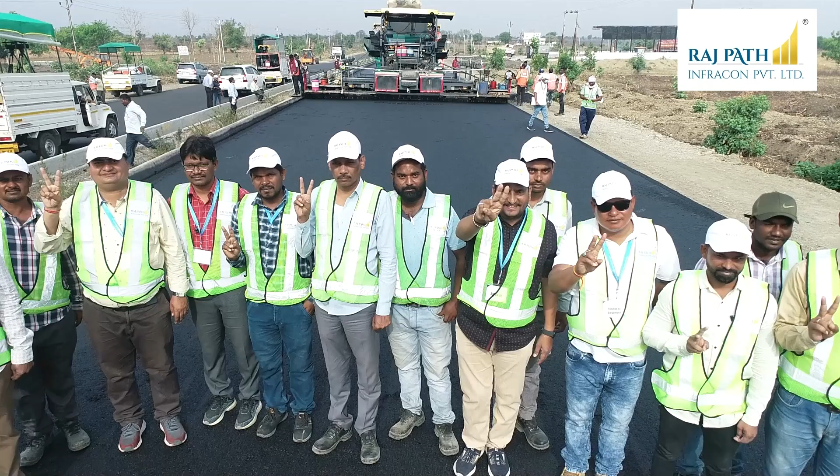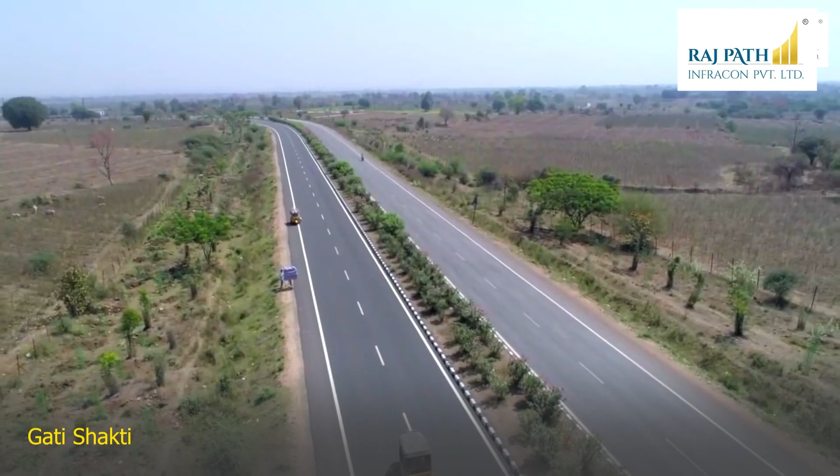The project Zauri 2.0 was born, driven by a will to pave a road of 75 kilometers and dedicate the effort to the nation to commemorate the grand 75 years of Indian independence, Azadi Ka Amrit Mahotsav. The honest intent was also to endorse support of the Gati Shakti project launched by our Honorable Prime Minister Mr. Narendra Modi, under the able leadership of Minister of Road Transport and Highways Mr. Nitin Gadkari, for multimodal, integrated and seamless connectivity for the movement of people, goods and services across our vast country.

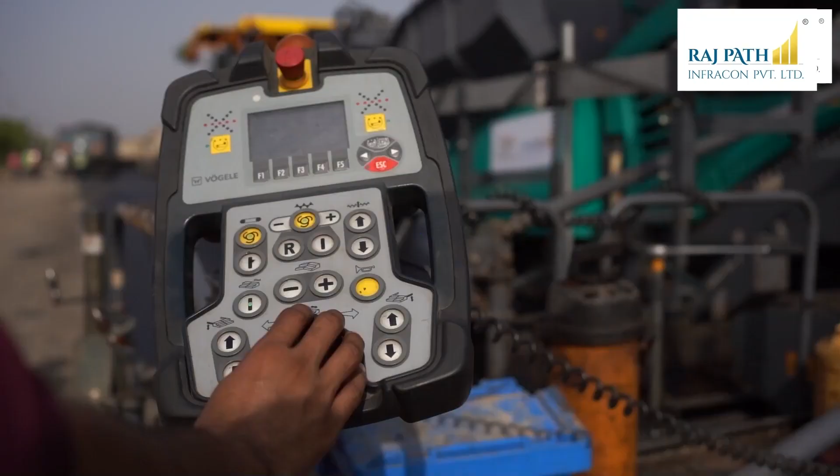The keys turned in the machines and paving began. From then on, the work continued seamlessly and non-stop, round the clock for 5 days. The team's tenacity and perseverance was tested to the limits.

The field team had to combat the 47 degrees Celsius temperature of the scorching sun and survived a 150 degrees Celsius of the freshly paved bituminous concrete on the ground.

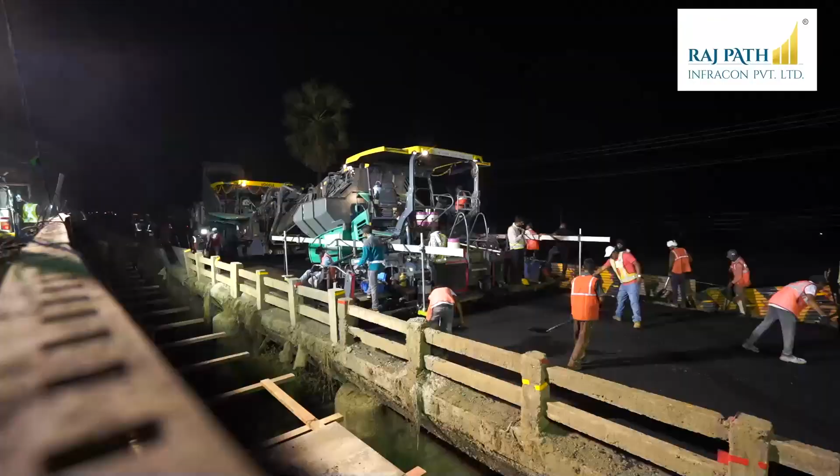There were tricky bridges to be paved, but Mr. Kadam's presence and guidance saw the team handle such curveballs smoothly.

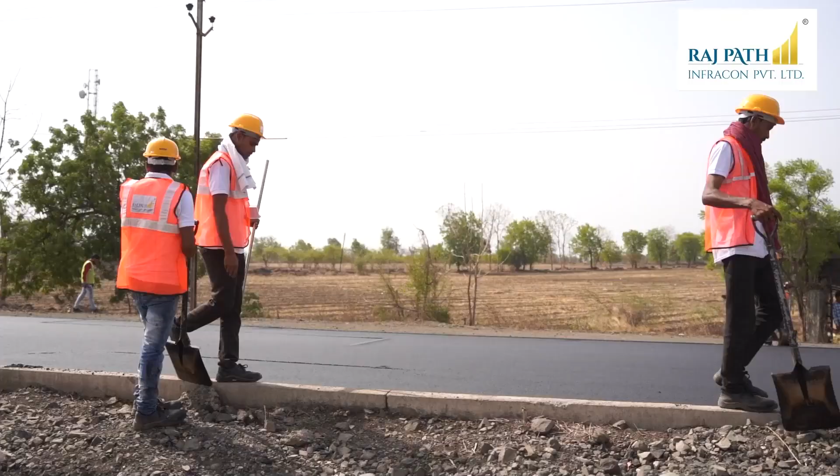The front and back end team went sleepless night after night to watch, monitor, supervise and ensure no glitches or hindrances created any obstructions in the work. They ate dinners in the fields and did not bother to even get changed.

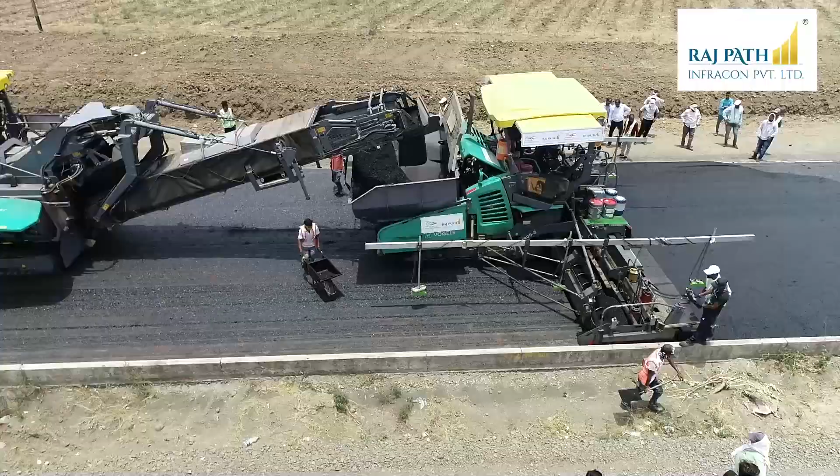There was no dearth of challenges that cropped out of nowhere despite intense planning. One of the batch mix plants broke down and the feed for the continuously operating paver was in jeopardy. This was managed by getting the required quality of bituminous concrete from a batch mix plant 80 kilometers away.

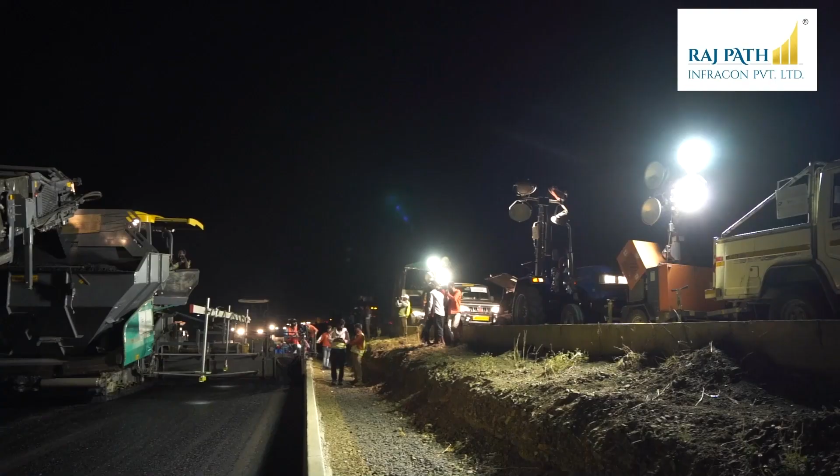The machine maintenance tasks included oiling, greasing, maintenance, troubleshooting and fueling without ever halting the paver. The expert teams from respective machine suppliers stood vigil to ensure seamless operations of such jobs and carried them out with fluent expertise. Despite all this, the work did not slow down or halt at all.

Accepting challenging assignments and making the impossible look simple has been the hallmark of Rajpath Infracon Private Limited. Rajpath looks at this accomplishment as an invaluable opportunity to leave its mark in this scheme of nation building and development that truly defines their motto: building the nation, beaming with pride.

I would request Mr. Kadam to kindly address the gathering.

I have 17 minutes more. I know it.

I must appreciate Thermax for initiating such a good event. This is, I think, the first event, the first year of Gapshap 2023. And I am the first speaker. I know my responsibility.

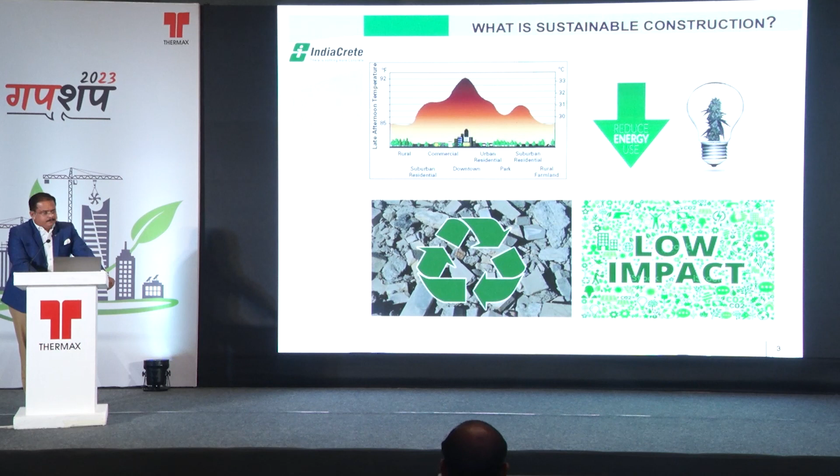We find environmental issues caused by bad management like CO2 emission, climate change, acid rains and deforestation. But by choosing the right kind of alternative energy, we can control this, and I think there is a need for the industry to properly select the amount of power consumption, water consumption, and control biodiversity, because ultimately we are responsible for our future generations.

If we consciously handle this material management, I think we can create long-term impact and reduce carbon emission and increase efficiency. Of course, during the delivery of the product, like constructing a building or structure, the maintenance part is also important, because by handling it efficiently and maintaining the building, we can increase the life cycle of our structures. And as we increase more and more the life cycle of the structures, we are indirectly contributing to reducing the carbon footprint.

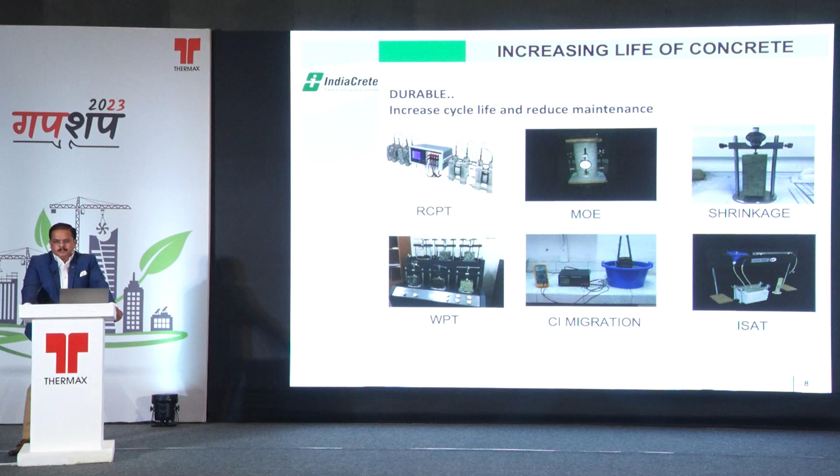Chloride migration and CI migration can cause long-term effects on your concrete and create weak concrete structures. So analyzing those impacts by properly testing and adhering with supplementary cementitious materials is one of the key areas.

Modulus of elasticity, understanding the stiffness of concrete, understanding the creep effect when constructing high-rise structures particularly, is playing a key role.

Water penetration test, water absorption test are giving increasing life for your durable structures, which can surely reduce down your maintenance cost and rehabilitation cost.

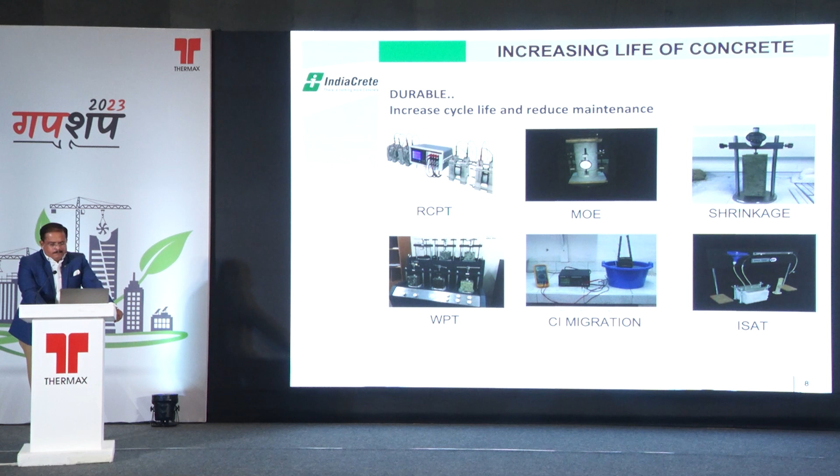You can have majorly larger floor spaces for utilization as well as for selling, from the developer's point of view, when they are constructing buildings.

With high performance concrete, you can reduce down the self weight of the structure and make your structures more rigid, more robust. The long-term effect of these kinds of things will surely increase the durability of the structure and help to create a sustainable environment.

Self-compacting concrete is one of the key areas where generally we are ignoring it because of the increment in cost. But trust me, the increment in cost versus the advantages we are getting are phenomenal.

5% of honeycombing is reducing your concrete member's strength by 25%. With congested reinforcement, and when you are spending so much on building structures and a sustainable environment, it is a key issue to create robust structures which are dense, which are more prone to sustain environmental and other issues like chloride effect and weathering effects.

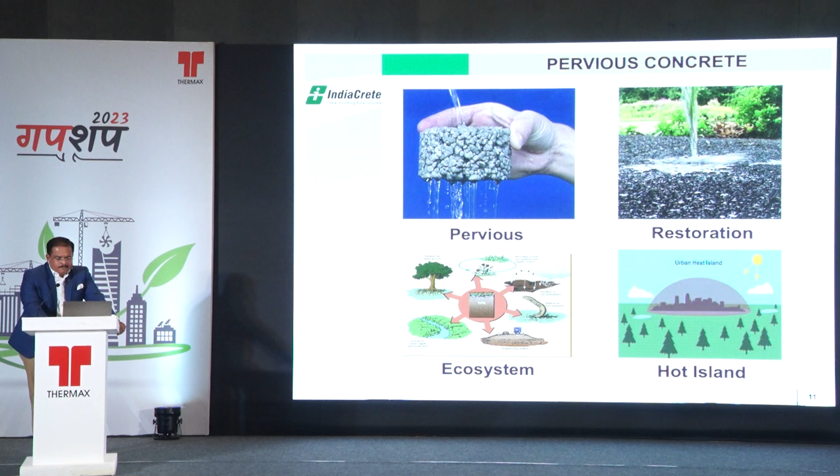Lightweight concrete - today fortunately we have lightweight aggregates available and we can produce non-structural as well as structural concrete. For non-structural concrete, we can have better insulation and lightweight concrete, and we can also produce structural concrete with designed aggregate manufactured from certain waste like fly ash. We can reduce the amount of soil required for construction of bricks and create an eco-friendly atmosphere.

Precast concrete is one of the key areas. You can have assured quality, assured speed, increased efficiency, and the amount of water we use for curing can be controlled through this. The usage of water is a key area when constructing buildings, roads and other structures. In the entire process, since it's a factory-made product, you can control the usage of fossil fuel as well as energy requirements.

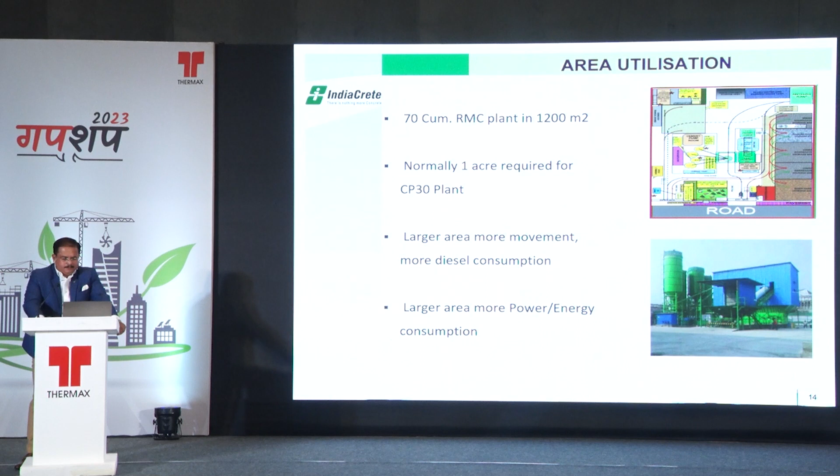Equipment utilization is key. A single rotation of a twin-shaft mixer is going to cost you, and electricity consumption increases in the long run. We studied the power consumption of our RMC plant over the last 2 years - we started monitoring from 2.5 units per cubic meter, and today we are down to 1.4 units per cubic meter. The cost savings matter, but you can create a real impact on the environment by saving energy.

Water consumption is one of the key areas that is most fascinating for me. By reducing water usage, you can create a very large impact. When operating an RMC plant, the general water demand in SSD condition hovers around 150 to 160 liters per cubic meter. But if you measure actual water consumption, it goes beyond 350 to 400 liters per cubic meter. This gap is basically created by mismanagement which we generally tend to ignore. Even with water correction, demand shouldn't go beyond 200 liters per cubic meter given the aggregate conditions we find in Mumbai and Navi Mumbai. The remaining water just gets wasted for cleaning and other purposes. If you put systematic efforts to reduce water consumption and recycle water at every stage, you can create a larger environmental impact. Over the last 2 years, monitoring it every month, we can proudly say our water consumption is now reduced to 260 liters per cubic meter.

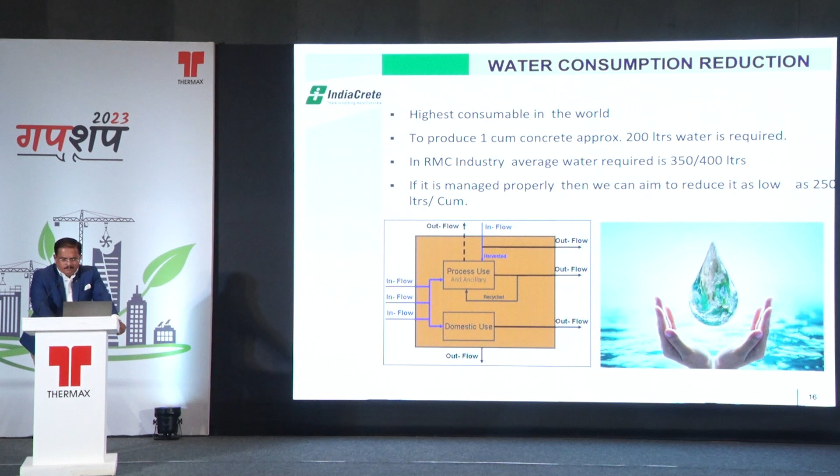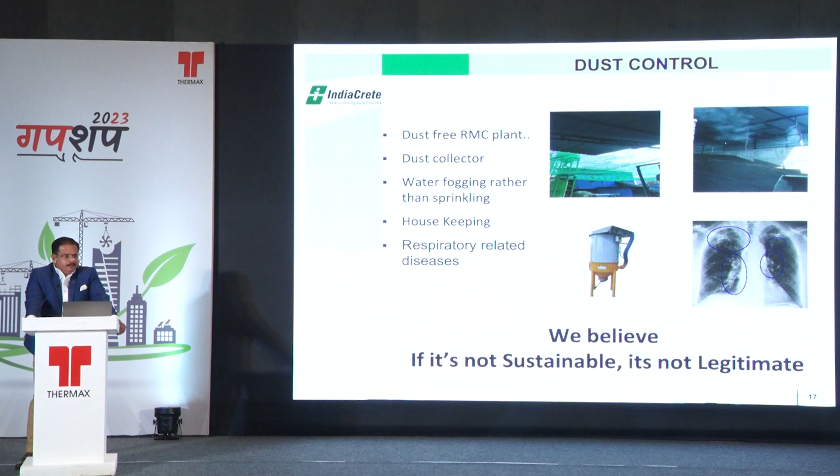Dust control is key. If I am moving around my plant, I will not prefer a dusty environment - though dust on Mumbai's roads is sometimes more than at RMC plants, I say. But we need to address respiratory issues, and we can fog our RMC plant with lower quantities of water to control it. Proper housekeeping, feeding systems for cement, and efficient dust collection systems will create a larger impact in the long run. We should find a day when we can proudly say that RMC plants are not polluting mother nature.

Average rejection rate or return of concrete is around 1 to 2% everywhere, sometimes increasing. Our focus remains on retention of concrete mixes, but due to many factors we try to address and sometimes ignore, the concrete gets returned back to the RMC plant.

It is rejected concrete, and the common mindset is to throw it in landfills. But with proper utilization of a recycling plant and washing that concrete, we can reduce this impact, I think, up to 0%.

With a proper sedimentation tank and recycling plant, you can wash out the aggregate part. What remains is slurry. With further reprocessing, you can utilize that water again with proper treatment, and the rest of the sludge and dried particles can still be utilized. Let us find how.

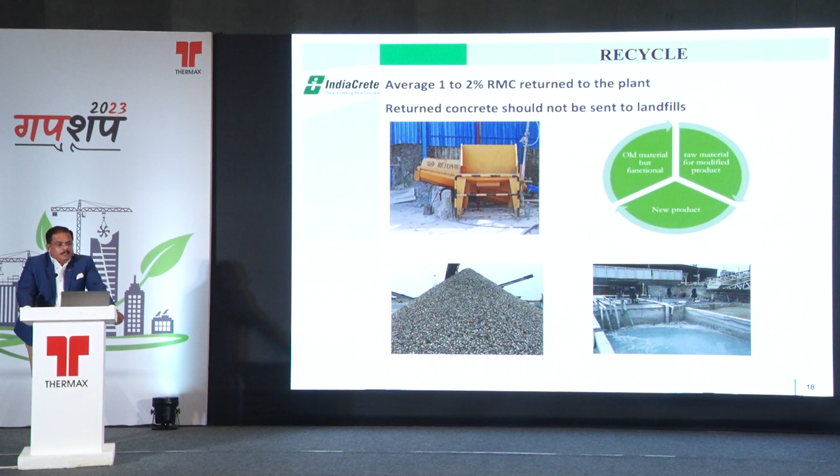C&D waste management is a challenge across India with every municipality. The key issue is many unwanted particles, unwanted kachara, keep getting dumped into waste bins, and it becomes a challenge for even municipalities to segregate it. But if we address that segregation issue, we can recycle that aggregate and reprocess it through wet processing.

We can utilize it for non-structural applications, and we can create certain precast products like paver blocks, curbstones for road construction, manholes, fencing walls, and other secondary items produced out of it. So imagine reaching a level where you have zero wastage from your concrete.

Let us build together a more sustainable environment and sustainable future by exploring different raw materials, and by giving more R&D, research and development, on different topics related to concrete and construction. Action is the best course of action. That is what I believe.

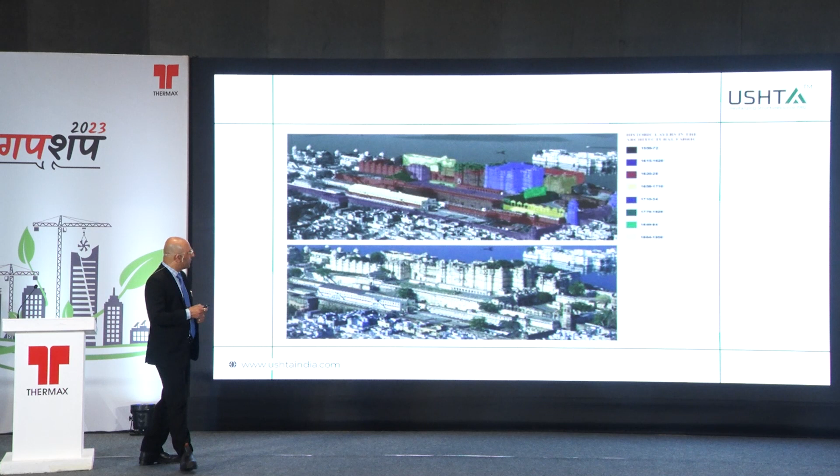Just to add to what Mr. Sawant said, structures last for a design age of maybe 100 or 200 years, but we see structures which have lasted 4,500 years as well, like pyramids. To that, I will say structures are like human beings - we can perform better under pressure, but not under tension. Similarly with old structures, they were all designed under pressure, whereas presently our structures are all designed under tension. That's just a lighter note I'm sharing.

So this was the Silehkhana that we did. This is the armory, and there were small rooms. The issue was City Palace presently has almost 15,000 visitors at peak, and imagine a situation where this room only has one access - entry and exit both the same.

So imagine if there is some kind of fire or emergency, it is impossible to exit. Looking at the present requirement, they wanted all these walls which were later added to be removed and convert it into the larger spaces which were there earlier.

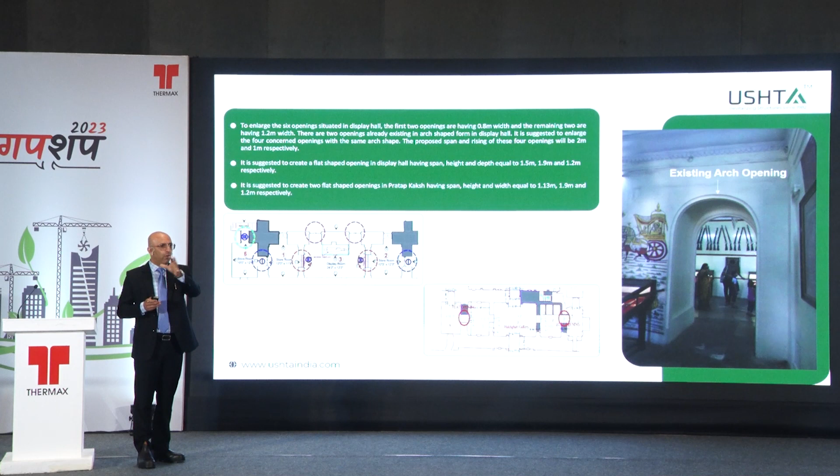For us, we need to understand that a lot of the structure is built around the hill, so some portions come in filling, some in cutting, and we do not know what kind of modifications were done. I'll show you one room where 4 walls were coming from different centuries.

These were the walls, and the smallest wall thickness was 800 mm, this big, and the largest was 2.2 meters thick - not the size, I'm talking of the thickness.

So what we did initially was the GPR survey. We wanted to know how the base is, what is the base of the structure, whether there are some water lines, because there were places where water seepage was blocking, and other places where in one room you'd find solid rock, and next place about 2 feet away there's a filling material used. So when we do any intervention, we should know what base we are approaching.

Then there were some cracks in the structures because of a lot of modifications done. We wanted to monitor that, supposing we are making any change in the structure, because while we were operating at the ground floor, there were 2 or 3 floors above with constant visitors - almost 15,000 visitors per day. Imagine if you do something wrong in the structure and it collapses.

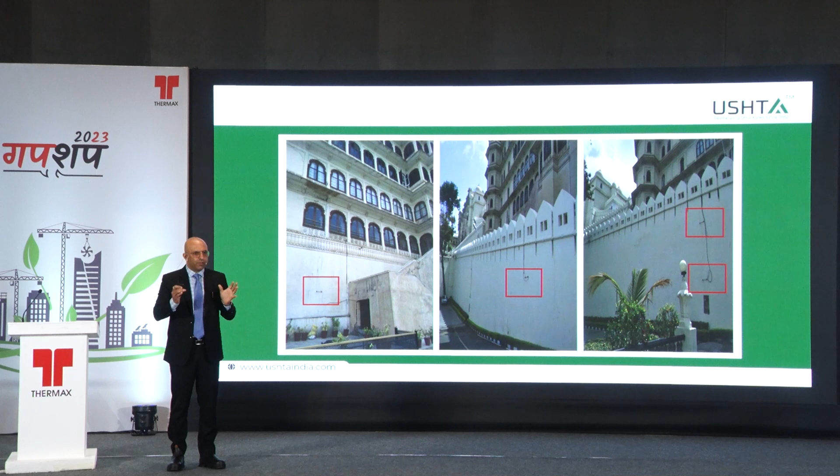It's a high risk job. So we wanted to make sure that before we do intervention, we have enough baseline data with us, wherein we know the kind of movement in the structure, and while repairing, and once done with the repair, what is the change in those readings. So we were constantly monitoring this data, available online with us, and we had set a threshold limit - if it goes beyond this limit, we'd immediately get an alert on our phones, emails, and everything.

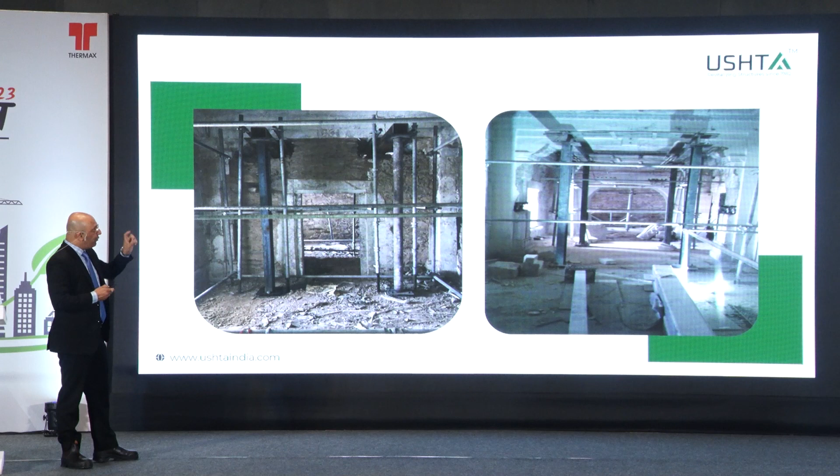We gathered a lot of data, of course. Because of shortage of time, I'm not going much into detail. Then we started supporting the structure and opening up the structural walls, doing some modifications in terms of strengthening them.

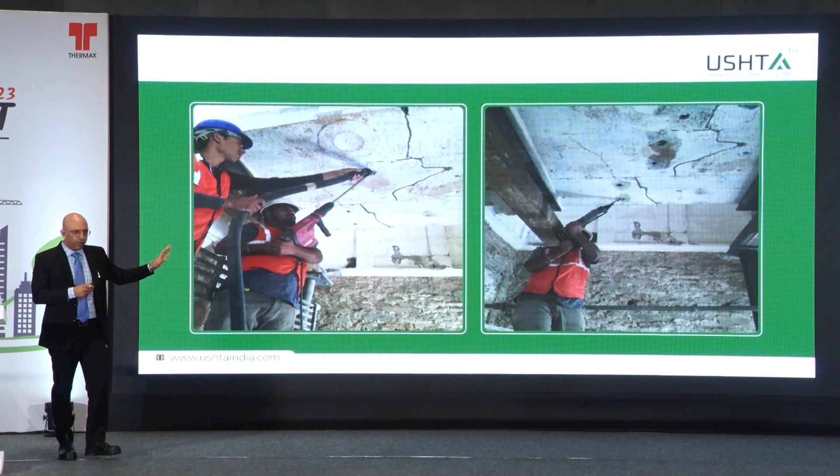There were also cracks in the stone, because as soon as they started cracking, that is when they introduced the wall. So we were to regain that and also strengthen the stones. So we introduced some helical bar pins in that structure. Of course, this was designed earlier, and we did a lot of design work before doing this intervention.

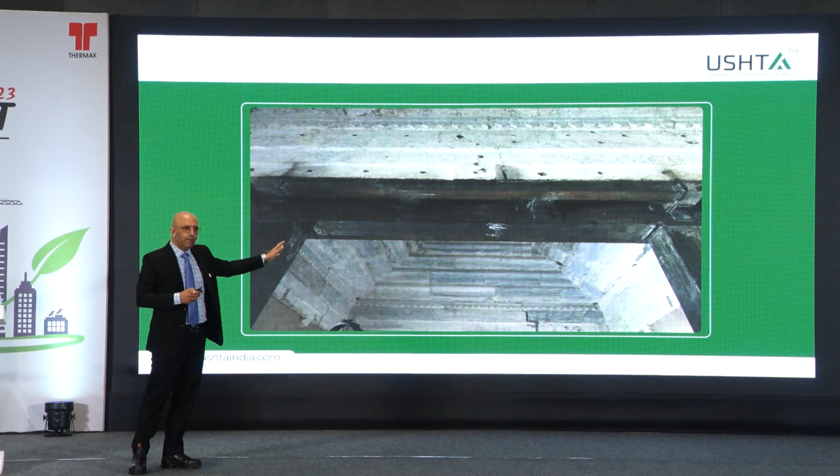There were some additional stone members that we added in a traditional way, so that it merges with the existing setup. There were some steel members also introduced in the structure, keeping in mind that we reinforced this steel structure with reinforced concrete, which is a very high strength concrete. Even if the steel member melts, the reinforced concrete itself will be able to take the load. So the second line of defense also was there, because we cannot forego the chances of fire in this structure.

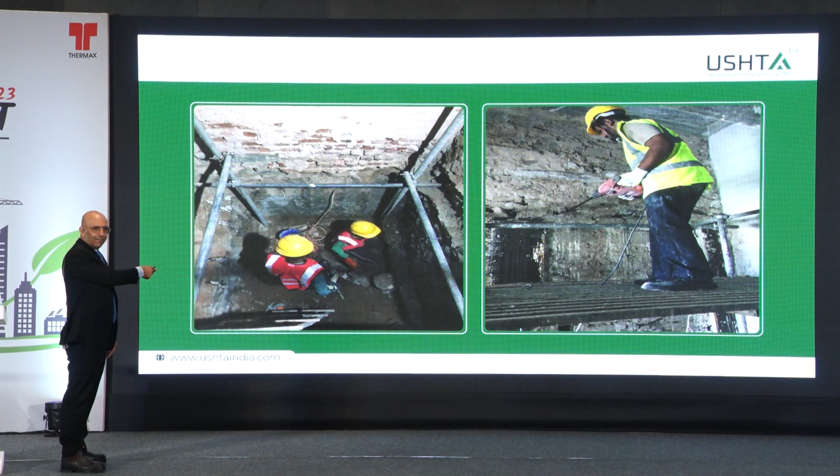Then this is the wall I'm talking about. Now we opened up this place because we had to cut an entry through the oldest wall of the city palace, which was done in 1530 AD. So that is where we wanted to cut the wall open. You can see this is the oldest wall, almost 500 years old. This wall which was there was about 350 years old. This was about 200 odd years, and this is about 50 years. And we had to cut an opening through this.

The wall thickness which we cut was 2.2 meters. And we had to cut it diagonally because, as I mentioned, it was on the hill. One floor was above here, and another floor was almost 7 to 8 feet below. So we had to diagonally cut that. It was a random rubble masonry wall in lime mortar, almost 500 years old.

So we built a base there, and we cut this wall through wire saw cutting, because had we gone in for any other method, this structure would have come down. So we resorted to wire saw cutting, which cuts very precisely, and even the lime mortar joints were not damaged, because that was the condition we had to work with.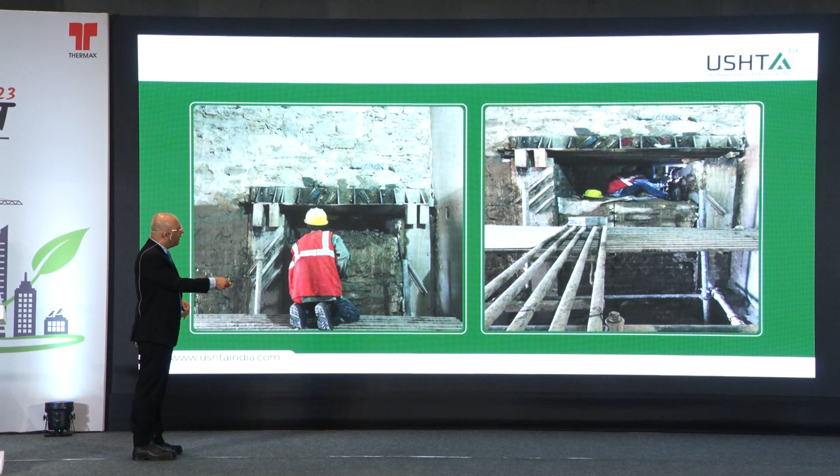This is the cut section after the wire saw cutting. You can see this level, and this level is almost 7 feet below. Then we realized after we opened this, that this wall only had a foundation up to this place. So now that we've cut it diagonally, we need to create a foundation here. And you had almost 3 floors on top. How would you go below this?

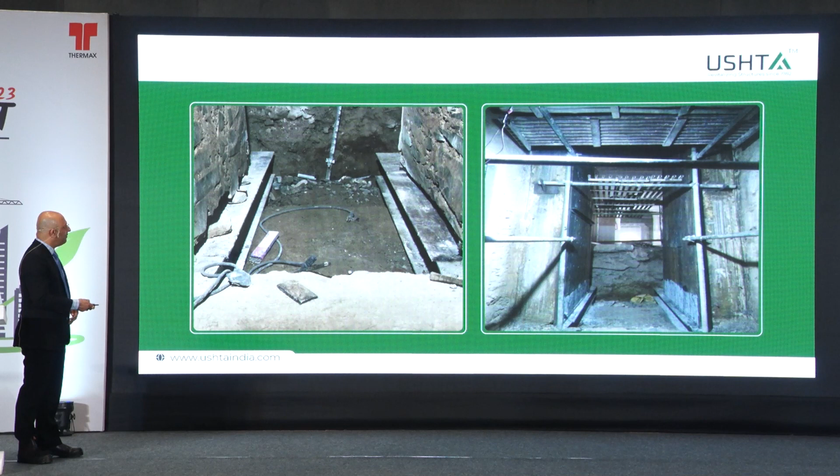So we created a transfer beam and created foundations on both sides and transferred the load. This is how we designed the system. And this is the small compartments which you saw, and this is the photograph after the finishing of the entire structure. So now we go on to the next case study.

So this is almost like a 70 feet long passage we opened. This one more interesting case we came across was...

One of the pharmaceutical plants. The issue was the main structure was absolutely very good. But when they reanalyzed the structure - this is an American pharmaceutical company - they found that the infill walls on the escape route, almost 220 number of walls, were failing. So imagine a situation, there is an earthquake, people are trying to escape, and more people will die because of the wall collapsing than the structure.

The structure is absolutely intact. Now the question was, while we were strengthening these walls, we realized that if we try to strengthen this wall, our frame was failing at some portions. And we were left with no option then to do jacketing by conventional method, which would take us almost 7 months of time to restart the plant, with a cost of almost 25 crores.

So then we realized we can use the principle of energy dissipation and strengthen the wall. I'll show you the principle, a short video of what energy dissipation is, and discuss further. By that, we cut down the shutdown time because they have an annual shutdown of every 15 days in a year. So we said, let's take up some of the walls in first year, second year, and third year, and we completed the entire job in 15 days each shutdown, 3 cycles, 220 walls completed, with a cost of just 6.5 crores.

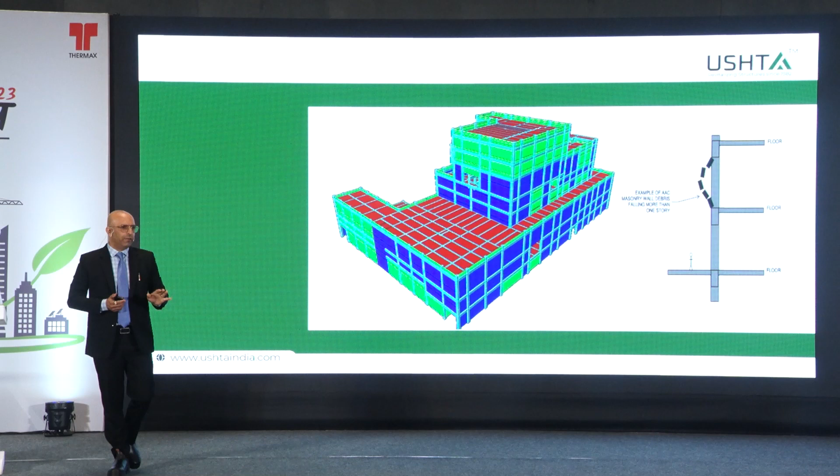So less is more is the example when we talk about this project. So at some point, can you play the video please?

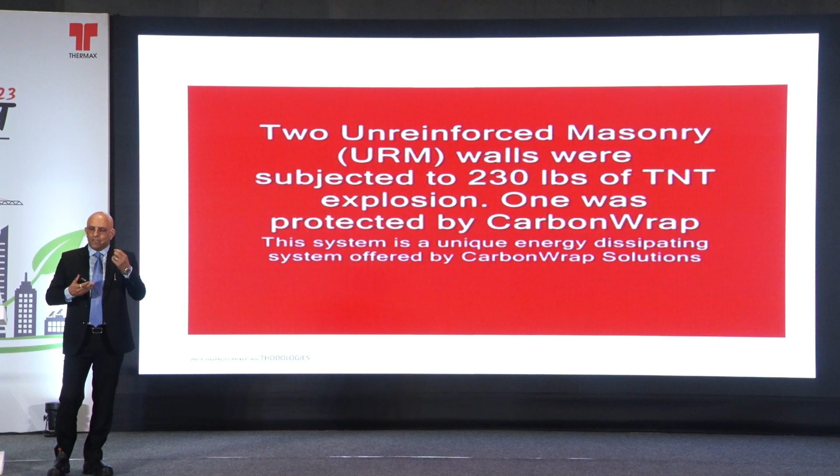In this I'm showing what we have used here is we are using different modulus of material in the same sheet, like we have done fiber wrapping here. But in fiber wrapping you have a single modulus of material, we've used different modulus of material. So when there is an earthquake or an impact, the initial material cracks and allows the energy to dissipate. The balance material, because the quantity is less, you will have more displacement, and thus we are increasing the ductility also. So that's the basic principle.

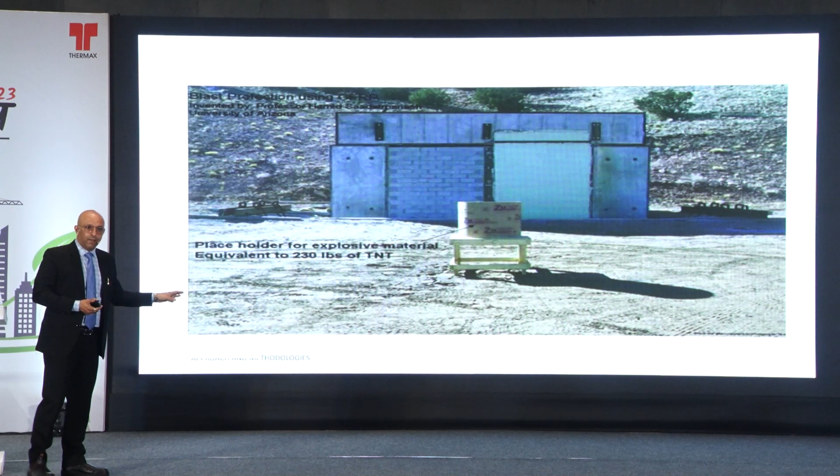So here we are displaying two walls wherein this structure was subjected to a blast of almost 230 lbs of TNT, that's almost one third the size that was used in the Pulwama blast, so you can have an idea. These are hollow block masonry walls, one is reinforced, the other is unreinforced, and then it's subjected to the blast.

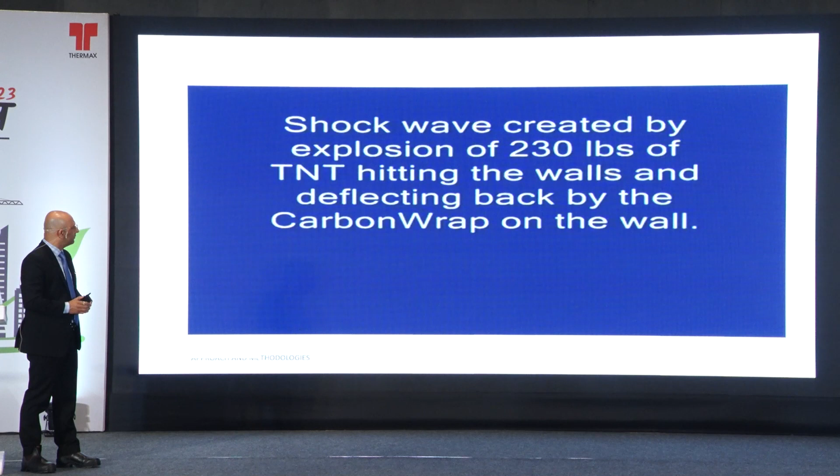You'll see the heat and the shock wave traveling.

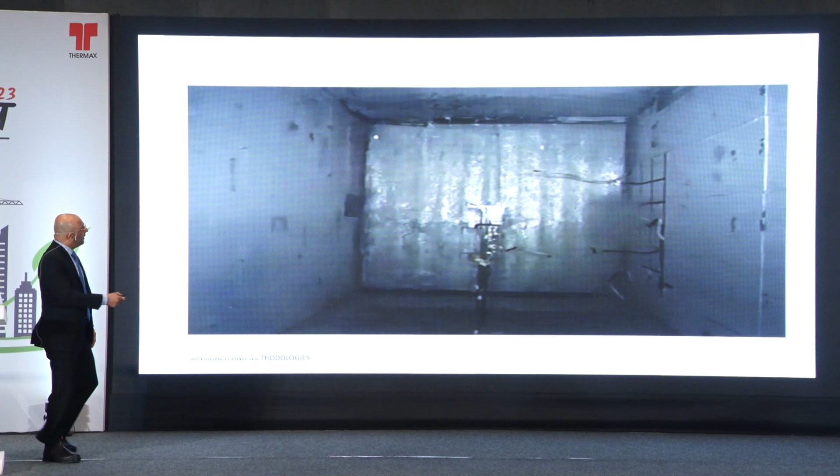Now this is the video taken from inside the structure where we had reinforced the walls. In this, what we've done is it is anchored to the top and to the bottom, and these sides are free. You can have anchorage on all sides, in our plant we had anchored it on the sides. So now you can see, measured force outside was 184 psi, and measured inside was just 1.5. So you're dissipating almost 99% of the energy in this.

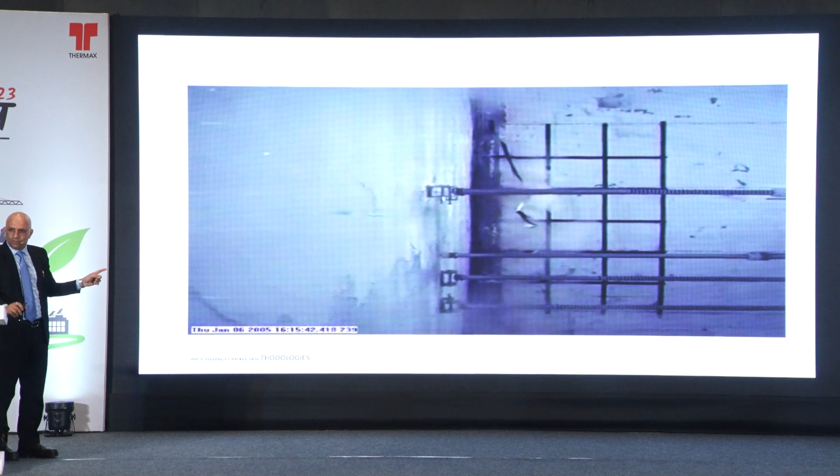Similar principle, now you can see from the side view, and this is a masonry wall. It deflected almost 4 inches on both sides and it came back to normal. But the wall did not collapse except for some splatter on the wall, there was no other damage observed.

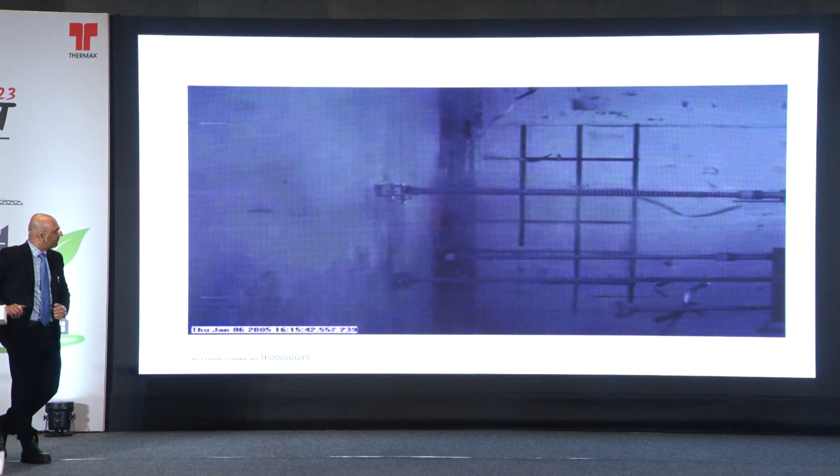Yeah, so similar here, and you can see the brick wall which is unreinforced, it just collapsed. I will show that after this also.

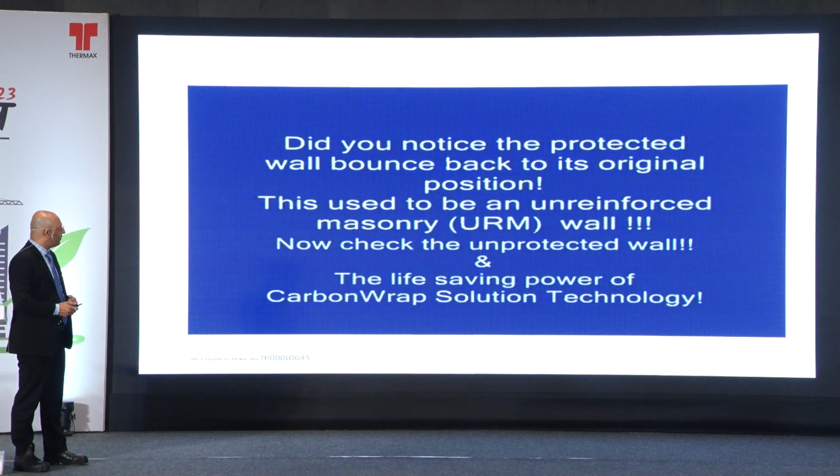Okay, so in that case, and in other places where we could easily transfer this to the walls, we used helical bars because this was very fast. And each wall, when we did with helical bars, we could give back one wall within almost 13 to 14 hours. In the fiber wrapping, which we did for energy dissipation, that took us about 18 to 24 hours, but we completed almost a single wall within that time, including painting, everything finished.

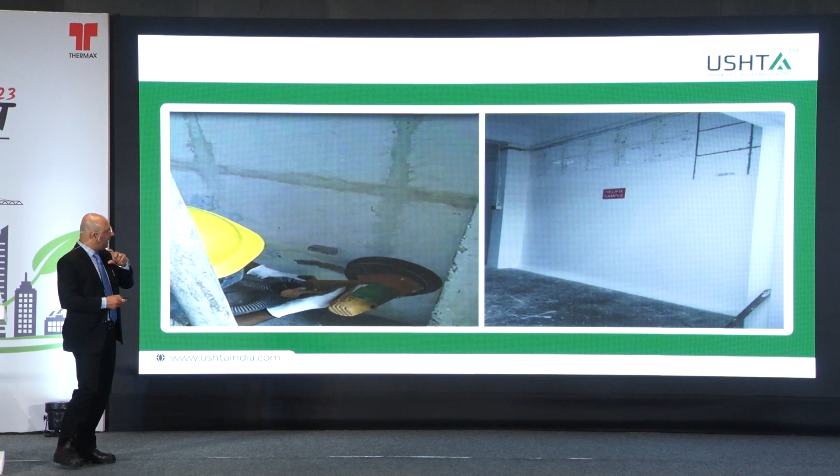So this is a sample wall we did outside. And similarly in fiber, instead of covering it with the entire band which you saw in the blast proofing case, here our requirement was not that big. So we used bands of 100mm thick, 100mm width at every 400mm center distance. That was sufficient enough for us, and anchoring was done on the side by fiber anchors.

This is the steps we've taken, so earlier we did some samples outside the premises for testing, and the same was replicated inside the plant. This is the photograph from inside the plant, because we had to maintain hygiene conditions also, dust and everything, we were very particular that there shouldn't be any dust when we were working there. These are some of the walls which were finished.

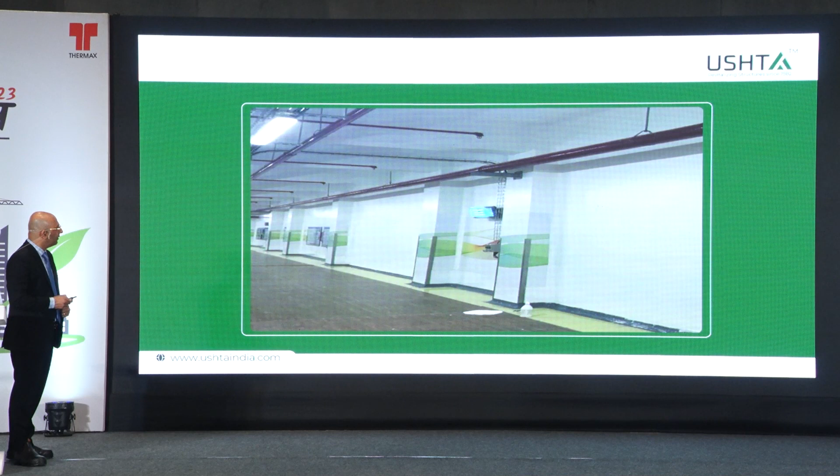So here you can see, because there was flooring already on the bottom, we could not do a bottom anchorage, otherwise we'd damage the flooring. So the entire anchorage was on the side of the columns and the floor was kept intact.

Another example I'm giving is of a bridge that we came across, on the Udaipur Delhi highway. The client came to us and said that we want to retrofit this bridge. So the question we asked was, what is the requirement? Why do you want to retrofit the structure? They said, when we analyzed the structure, we found there were some deficiencies in terms of design. So we asked, do you see any kind of deformities in the structure? And the answer was no. We saw this bridge, and trust me, there was no sign of corrosion, no sign of any distress in the structure.

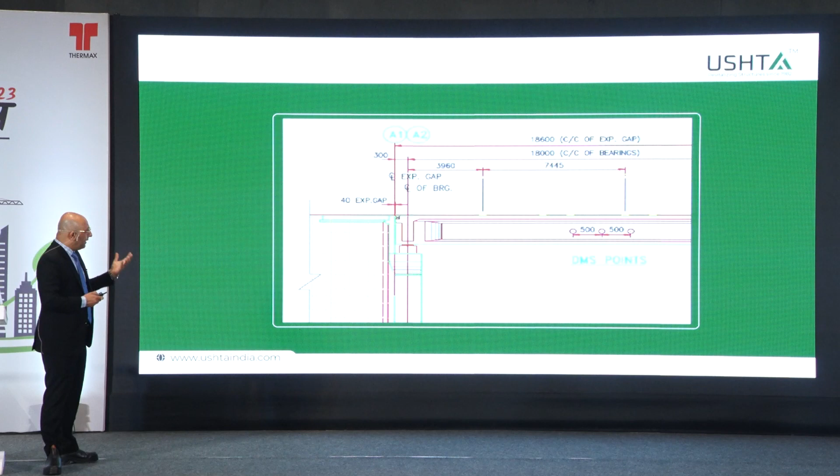So we said, okay, let's investigate a little and know how this structure is performing. Initially what we did was we conducted a load test, had some parameters like what is the permissible deflection when we do the analysis, and if we are doing the load test, what parameters are we getting. We monitored this because it's a river bridge.

So we monitored using a contactless system known as high-speed videography emitter, and by that we can also measure strain because it's a physical property. We had this equipment because it was a river bridge and there was no possibility of monitoring this structure by erecting scaffolding or something.

So we did a contactless monitoring here, and all the data were collected. Loading and unloading data were collected, and the structure performed marginally well - we were within limits, but very fine limits. So we decided, let's subject this structure to all kinds of possible traffic conditions and see what data we collect. That was the real-time monitoring we did, because often there is a lot of reserve capacity in every structure that we forget to discover, or we don't see in totality.

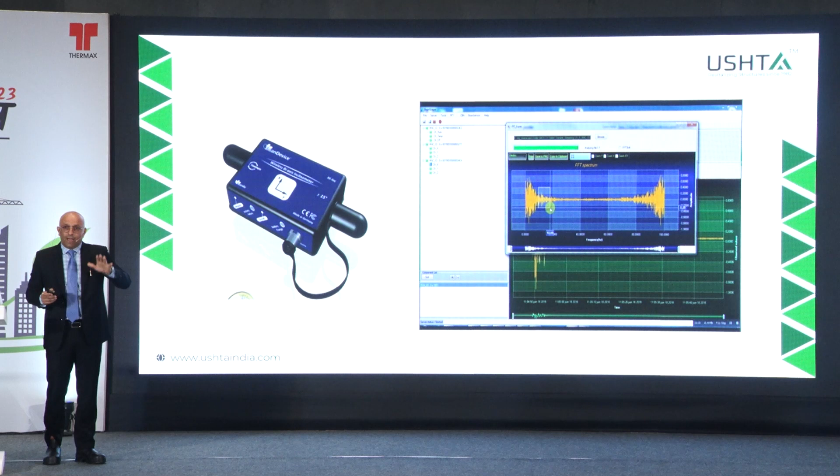So in this project we decided, let's subject this structure to different traffic conditions - like if there is a traffic jam, if heavy vehicles are moving at high speed, if one lane is jammed or the other lane is jammed. We tried all possible permutations and combinations, and started taking readings to find the exact utilization the structure was doing. Sensors were fixed to the system, and all possible permutations were noted, with readings taken at regular intervals. And we realized...

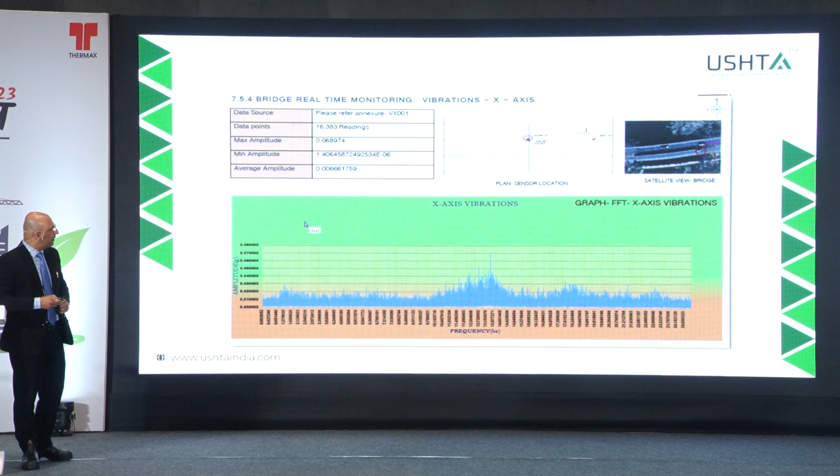Theoretical deflection was 9.78. What we attained during the load test was 8.75, and in the worst possible traffic condition it was just 0.99. So we weren't even using 10% of the capacity, and we were talking of retrofitting.

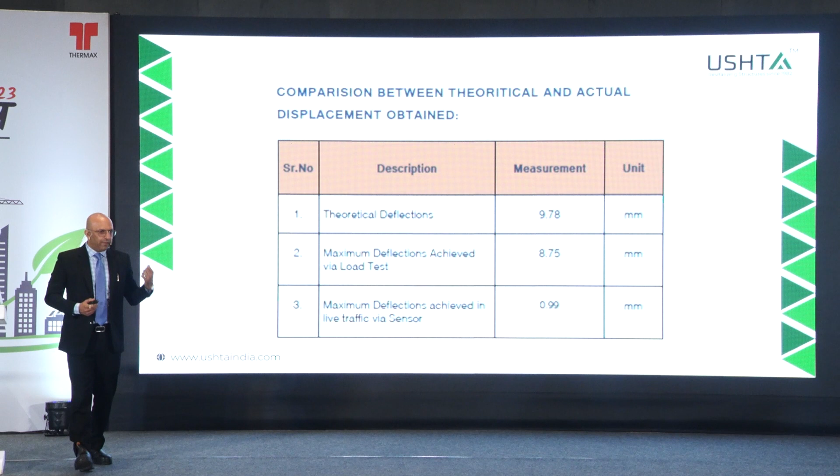So sometimes, as I mentioned, less is more. You should see whether your structure, just because it doesn't pass in one parameter, that doesn't mean you shouldn't look at other parameters. There is some reserve capacity in this structure - you should always explore the possibility. After our report, almost 7 years have passed, and this bridge is still functional, with not a single crack at the present traffic condition as well.

Thank you. I'll take another case study.

This is one more structure in a fertilizer plant - a 126-meter tall chimney. The outer shell is RCC, almost 15-meter diameter, and inside there are 2 steel stacks. The problem was corrosion - there was no access on top. The staircase had collapsed, the platform had collapsed, and the steel section had reduced at some places to even 1 mm. The issue was, if this continued, one day the structure would have failed.

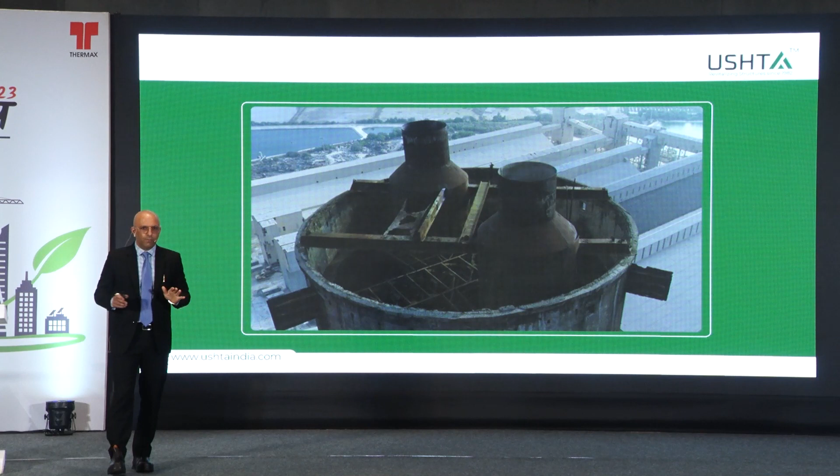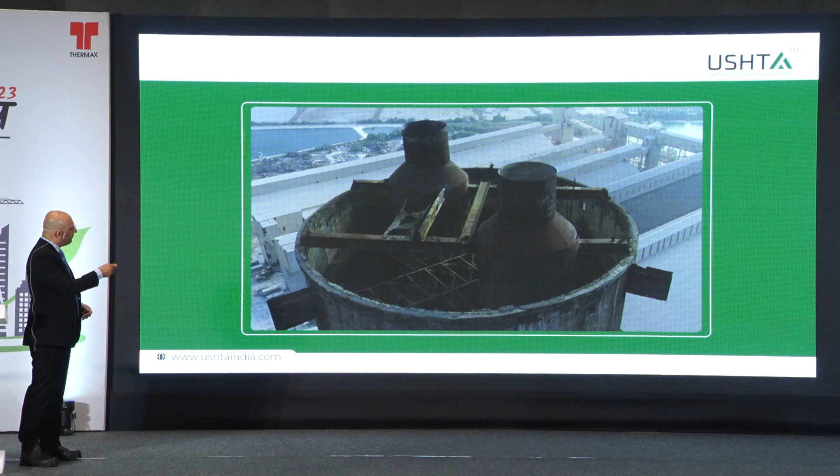Failure means a loss of 21 crores per day for this plant, even stoppage. Constructing a new chimney was not possible because of congestion in the plant, so they were left with only one option - retrofitting this structure, and that too online. We were not allowed to take a single day shutdown, except for the annual shutdown of 12 days. So initially we explored the entire thing with a drone survey since there was no access on top, and we realized the platforms and everything had totally corroded.

Then we did some testing on the structure and designed a complete retrofit system. Inside the structure you can see the condition of the steel stack - layers, almost 30-40 layers of steel. At places where we tried to weld, it would crack because the thickness left was only 1 mm at certain places. Now we were left with no option.

We couldn't add additional steel plates because while welding it was just tearing apart. And the problem wasn't only that - these are dangerous gases. So if we cut any section, a person working there would die on the spot, because we needed gas masks too, as this is a very dangerous gas - it's a sulfuric acid plant.

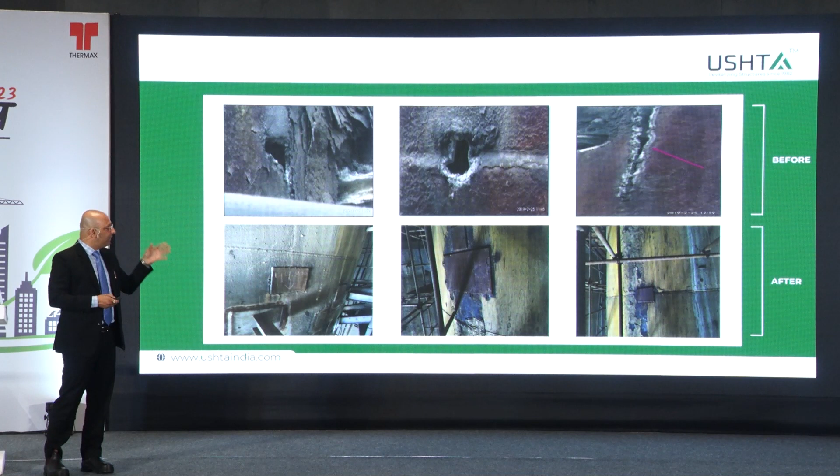So there we resorted to strengthening this structure with carbon laminate and isolating that portion, transferring the entire load from the top to the bottom, isolating that mid portion - and that's how we designed the system.

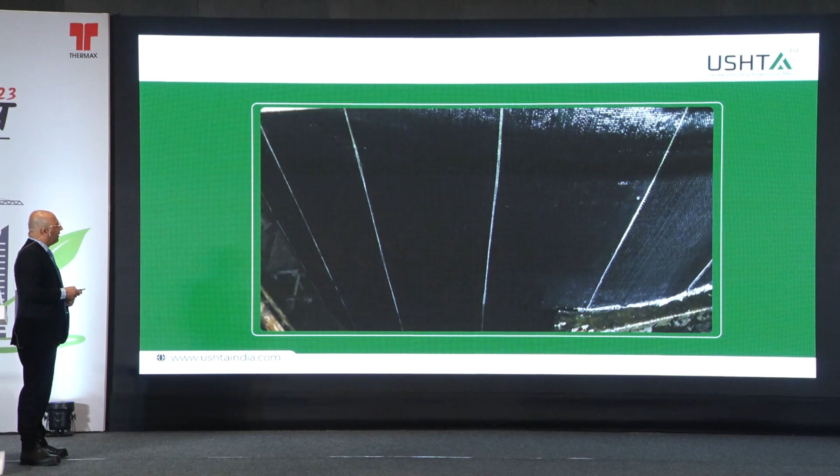So these are laminates which we have used, and the resin here is a vinyl ester resin, because sulfuric acid would not work with epoxy and other materials. So we resorted to using vinyl ester resin here.

And the staircase was replaced by SS304. The main problem was the top concrete, because of condensation the top portion of the concrete had corroded and there was no steel left. So we replaced that with a normal coated steel.

And later on we repaired it with a resin mortar, because had we used cement mortar, it wouldn't have even lasted for a month. It would just debond.

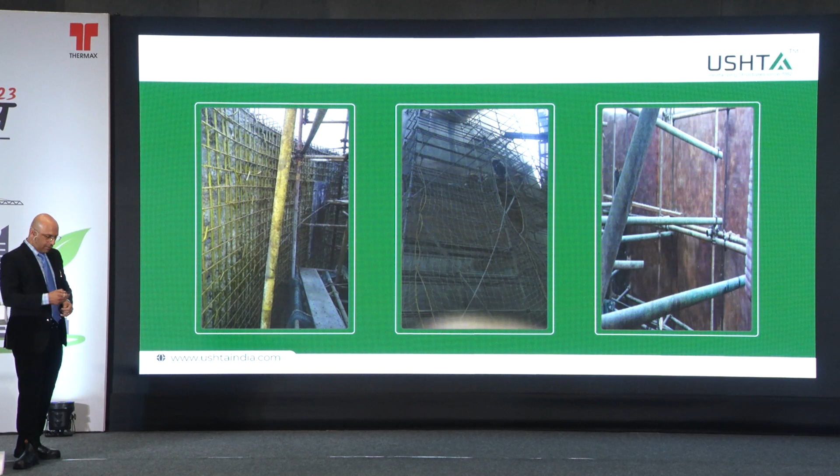The other issue was the wind cutters or wind strakes which was there. This is supposed to be a 20 mm thick steel plate, but it's like perforated, now just like paper. So we replaced it with composite sections.

These sections are made out of fiber, which are lightweight in section but very sturdy, in terms of weight to strength ratio higher than that of steel. And there is no corrosion.

So even if you don't paint it for another 15 years, it's fine. This painting is at 124 meters, and each size is 1.5 meter by 1.7 meter, so you can't have access to this. And this is the structure before and after.

And now I'll jump over to the last case study. So once we were doing this, we thought there is a lot of infrastructure in terms of pipelines and other things which is absolutely neglected. You see a lot of retrofitting happening in buildings, in structures, in concrete, but what about the pipelines?

When you go to any plant, any refinery, there are hundreds of kilometers of pipeline which are damaged, which are corroded, they're leaking, and they're fixed by some rubber gasket and a clamping from the top. But what about their durability, or the sustainability of such structures?

So imagine a case where in certain structures in the battery area, you can't do any kind of hot work. How would you change almost 300-400 kilometers of pipeline? So we've developed a system where you can retrofit a pipeline, creating a pipeline around a pipeline without any hot work.

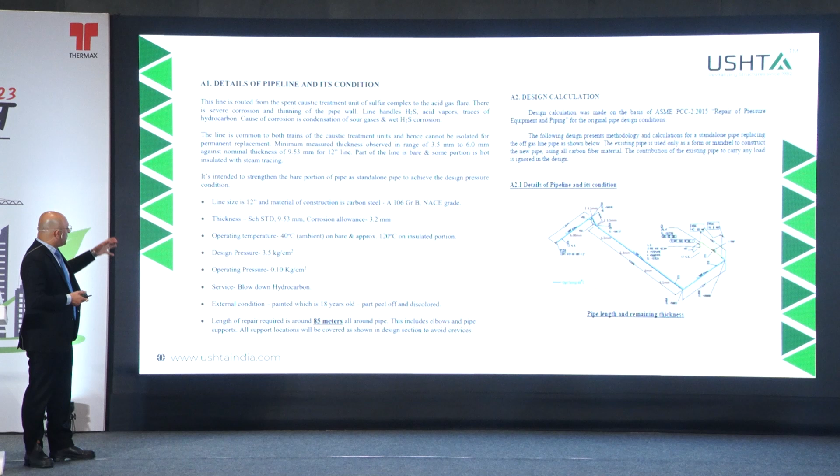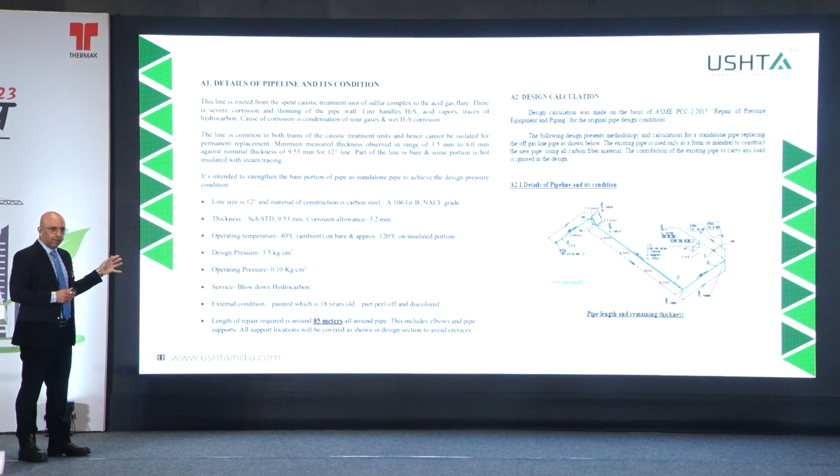We have repaired pipelines right from 12-inch diameter to 2.5 meter diameter. Then you need to understand the design thickness of that pipeline, the pressure, the operating temperature, the external condition, exposure condition - all that has to be kept in mind while you design this system.

Otherwise, what will happen is, because we are creating a standalone pipeline - imagine a situation, even if you remove that existing pipeline, our pipeline which we are creating is good enough to take all the loads. So that is how it is designed, a standalone system.

So we did a pilot project for one of the refineries, and that was almost about 85 meters of pipeline, which had different kinds of bends and supports and different conditions.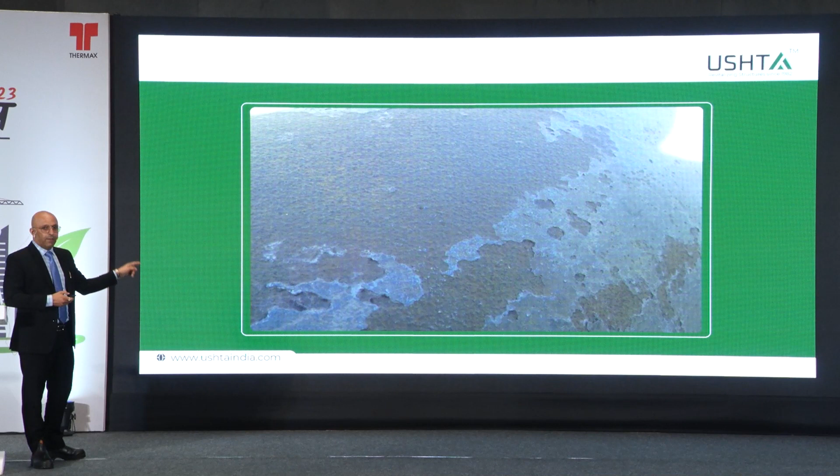And in this, this is the condition - some places it was leaking also. And the condition given to us was we can't even use any kind of abrasive here to remove the paint. So we just had to work with this. We just kept the paint as it is, and wherever it was very loose, we just removed it very carefully.

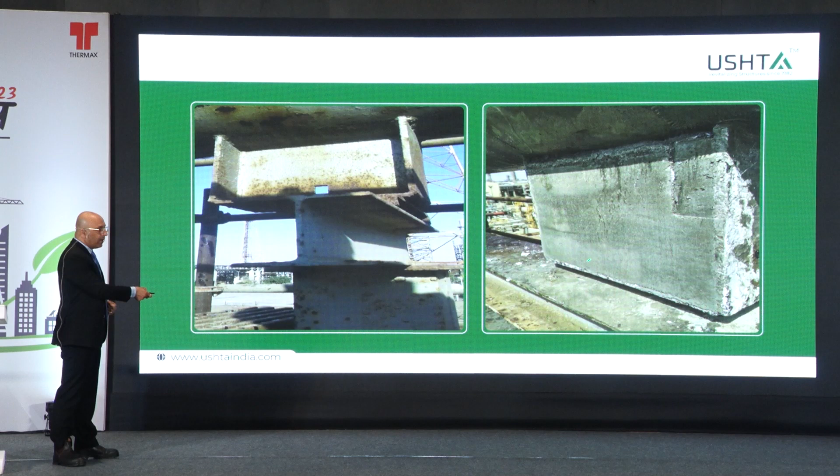Initially, all the saddle supports which were there, we filled in with micro concrete and made it so that if we wrap around this, we can easily do it without any sharp edges.

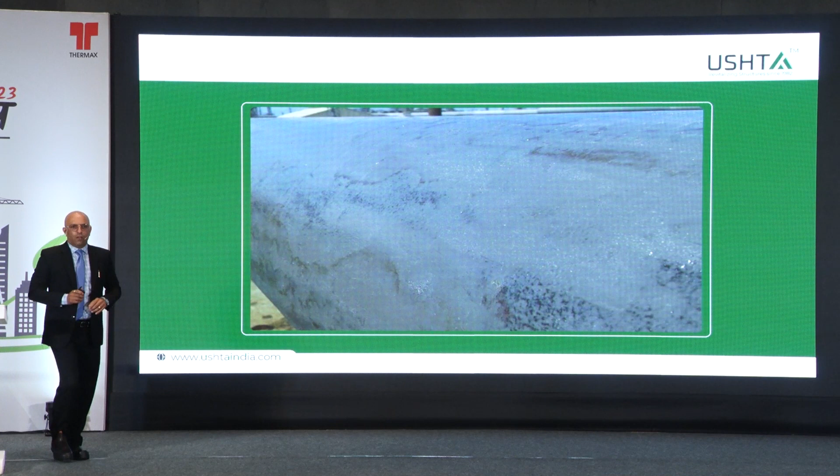And later on, we applied this putty on the top. Now this putty is designed in such a way that, because steel will have a different coefficient of thermal expansion compared to concrete, we designed this so that it can expand accordingly and will not crack.

And later on, we applied one layer of glass, because carbon is a conductive material, and normally you do not apply carbon directly to the steel surface since some of these lines are charged. So to insulate, we applied glass fiber, and we had to pass a holiday test - when you do this first layer, they take a holiday test, pass current through it, and if there is any void, even a fine void, there will be sparks. So we had to give 100% holiday-free pipes.

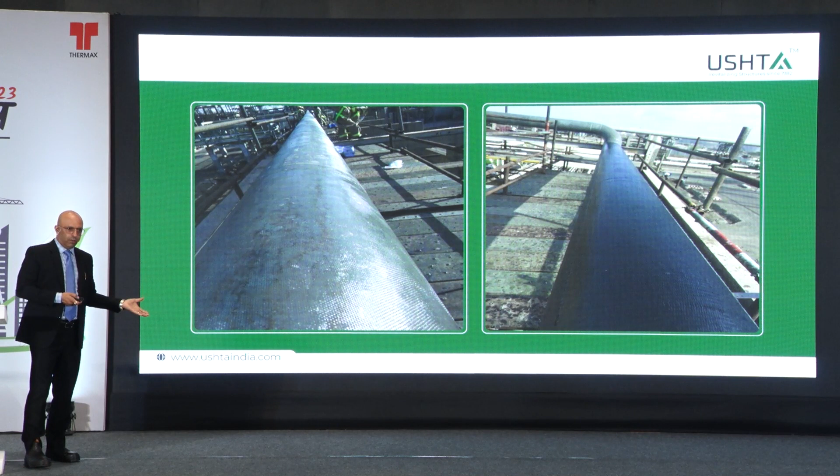And later on, depending upon the design, we applied different layers of carbon, and this is how the entire pipeline network was restored, and this we've guaranteed for a lifespan of another 20 years. This is the pipeline completely after repair. So with that, I end my presentation. Thank you very much for listening to us.

Cement is not used as cement alone, as all of us know; it is used in various forms: ready mixed concrete, site mixed concrete, as Savantji has dwelt on in detail regarding ready mixed concrete. But as a cement sector, we have to supply to various segments. Take precast concrete, which is at its nascent stage even in our country now—if you look at precast, it is just solid blocks, hollow blocks. Very few projects are using precast segments on a large scale, which is much more environmentally friendly.

Then we have non-structural applications for mortar. But if you look at the performance characteristics of concrete or mortar, it is entirely different, which is not being recognized by many of the unorganized sectors within the construction industry, because they are still using OPC 53 for plastering and even for tile fixing, which is an area of grave concern. So we should at least try to reduce the usage of cement wherever we can.

Nowadays we evaluate concrete on the basis of compressive strength alone. Most of us say M40, M50, M60. But are we evaluating the durability? Are we measuring or monitoring the durability of concrete, which to a certain extent will determine the lifespan of the concrete structure?

In our Indian standard codes, we talk about deterioration mechanism, we talk about durability, but we are not able to connect durability to the lifespan of the concrete structure, because such kind of models are not there in the Indian standard codes.

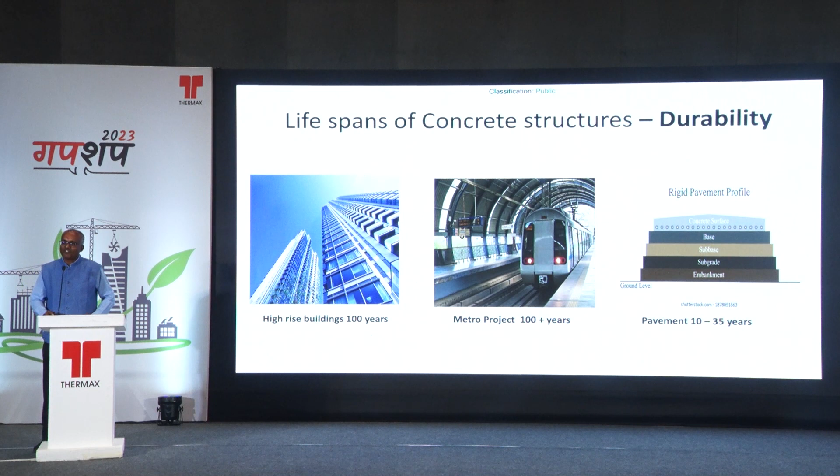So it is not necessary that every structure has to be designed for 50 to 100 years. The structure has to be designed for the lifespan it is meant for. That is a very important and key thing that we need to keep in mind.

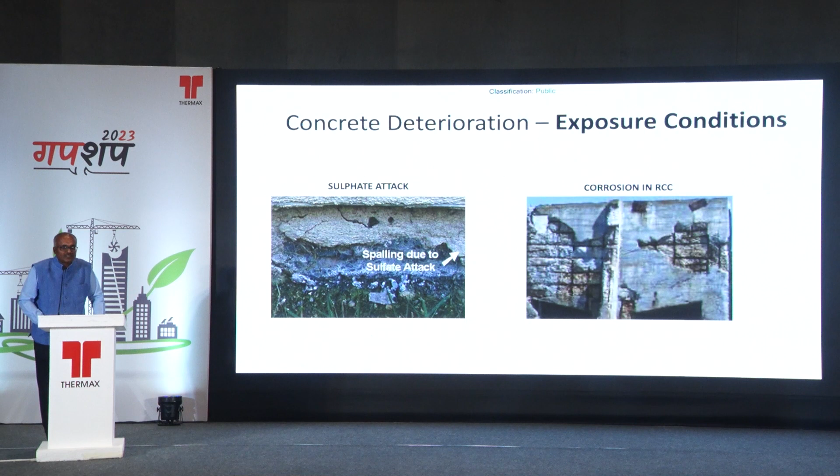If there is a sulfate attack, why not recommend sulfate-resistant cement alone? But the problem with sulfate-resistant cement in sulfate attack is that if you are not doing adequate analysis of soil, and if there is chloride, SRC cement is weak in resisting chloride. So things like that have to be kept in mind while we recommend a type of cement. SRC is good in resisting sulfate, but weak in resisting chloride because of the C3A content. We have to keep that in mind when this kind of problem comes.

Of course, these are the basic things that we need to keep in mind. How do we maintain impermeability in a concrete structure? We can take RMC - they have a controlled way of making concrete. Precast has a controlled way of making concrete too. But what about site mixed concrete? So in site mixed concrete, we need to see how we can maintain that.

In many places where we go, we see that water cement ratio is not controlled. But today technology has come where water cement ratio can be reduced to as low as 0.2 or 0.25 by the use of chemical admixtures. But then there's cement content plus blending materials - all of us know blending materials like fly ash and slag.

The problem is many of the specifications that are there have changed a lot over the years, but still a lot of things have to be done, because in terms of usage of fly ash, it is not just from an environmental perspective alone, but it also enhances the quality in terms of lower heat of hydration, in terms of ensuring that the concrete is impermeable because of the mechanism of the CSH gel getting strengthened, and the calcium hydroxide, the free lime, gets reduced because of the reaction of fly ash or slag with those materials.

Of course, admixtures have to be used wherever needed, and in a way that is compatible with the type of cement, so sufficient number of trials is required. While we interact with customers of various segments, we have seen that trials have been done once in a month, or not done frequently. But what is to be done is that it has to be done frequently to check the compatibility of cement and admixture, compaction of the concrete, and adequate curing.

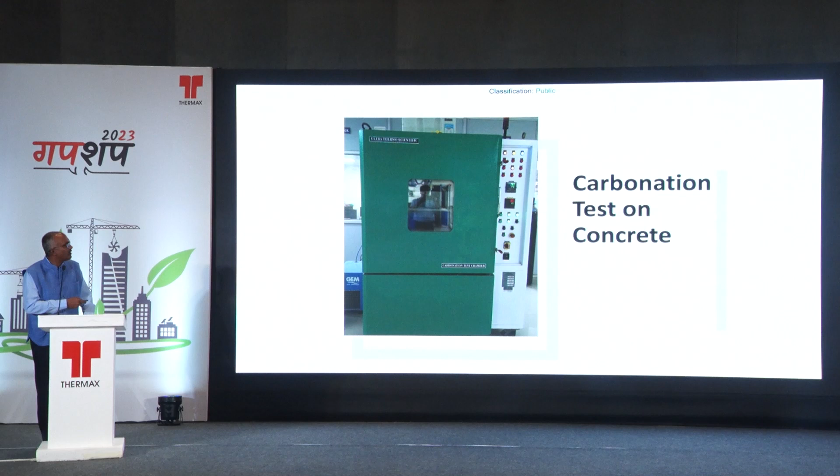So especially, all these tests are there. So all the major deteriorating mechanisms, whether it is sulfate attack, chloride attack, or cracks, can all be measured in the laboratory. Of course, all of us know about this.

What matters is concreting practices matter, because even after so many years, we will find a lot of small construction segments where they don't have sufficient infrastructure to measure the quality of concrete.

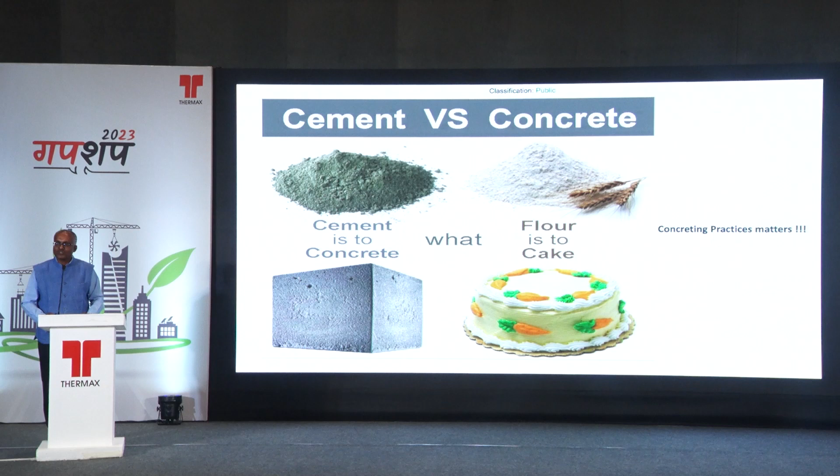Like say, for example, water cement ratio is one of the important things that we find is being compromised. You will find that rarely we do the grading of aggregates, because there is no choice in many of the places - you don't have those sieve analysis setups which we would have learnt in our professional courses. Rarely can it be followed.

But the thing is, as the grade of concrete goes higher, it is very critical that grading of aggregate has to be there. One most important thing is that we can economize on the quantity of cement being used if we do the grading of aggregate. And if you use less cement, it is green concrete that you are making. So that is where the grading of aggregate plays a vital role.

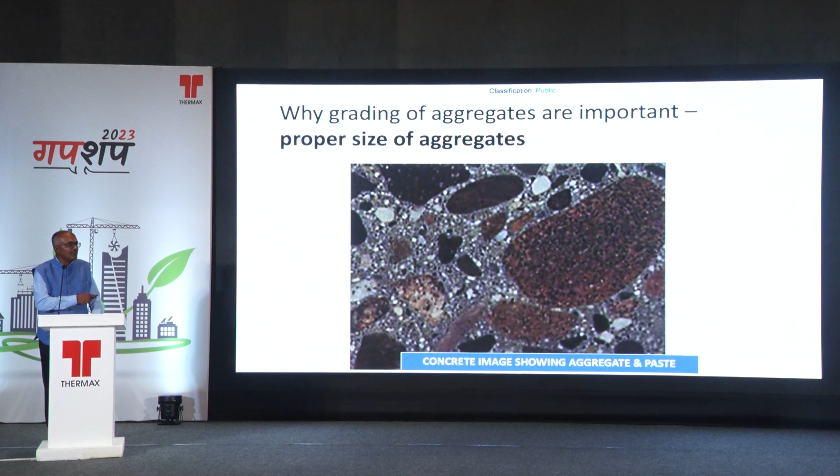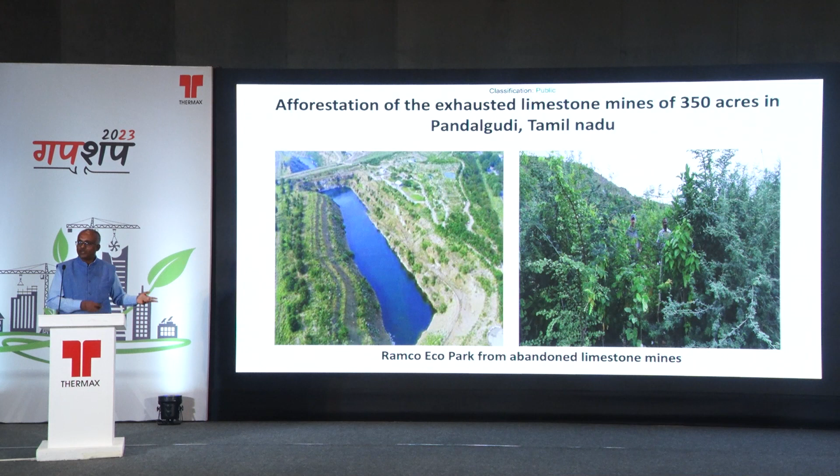So in the cement industry, we see how emissions can be reduced at various stages. For example, in an abandoned limestone mine, afforestation can be created. We try to follow the Miyawaki plantation type, wherein saplings of native species are planted close to each other, so that when they grow up, sunlight doesn't reach the ground and weeds cannot grow. We have implemented this in many abandoned limestone mines. It's not necessary for everyone to do it, but when you convert an abandoned limestone mine into an eco park, that much we are trying to reduce greenhouse gas emissions.

Research and development centers play a vital role, because each construction site is different. The challenges they face are different, and the aggregates they procure are different, so the mix design also has to be customized. As a solution provider, one needs to provide these kinds of services to the construction segment so that customization is in place.

Mining can be done through environmentally friendly means rather than only following drilling and blasting. You can go in for surface miners, which is more environmentally friendly.

In the vertical roller mill, particle size distribution of cement plays a major critical role, because it's not fineness alone that matters. In our test certificate, we just write the Blaine's fineness test, but more than that, the particle size distribution is very important so that you get an economical mix design and a durable concrete can be made.

As far as cement manufacturing technology is concerned, India is considered one of the topmost in incorporating technology in the cement manufacturing process. One such technology is the cross belt analyzer. As the raw material comes in, online analysis is done in terms of high grade limestone, low grade limestone, and how much silica has to be added in the raw mix design. This has been a kind of game changer in the cement industry, because you cannot replace cement as of now.

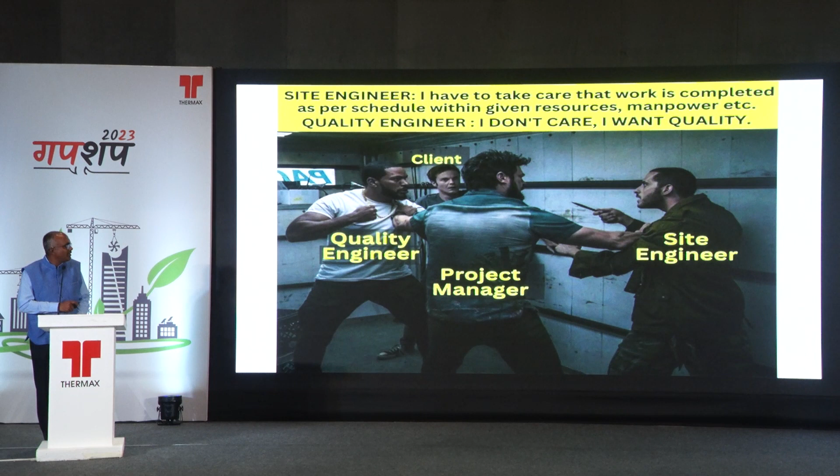That is very important. So I'd like to leave you with this thought: does concrete need maintenance? Yes, it does. In many places, a simple practice is ensuring the concrete does not get waterlogged. We've seen dampness in concrete roofs, so is there provision for drainage of water? A simple example of concrete maintenance is having sufficient outlets so water gets out during the rainy season. These are some of the things that need to be done.

So concrete can be made more sustainable, but it needs to be maintained. Maintenance of concrete also needs to be given much more importance. All these measures, we are sure, will ensure that concrete can be made much more green, much more sustainable, and will fulfill the requirements of the construction industry.

So all of us have a role to play. This kind of Gapshap, I am sure, will throw out a lot more ideas. Conversations like this will help us have deeper insight. Thank you so much, Thermax, once more for having given this. Thanks, Ravi, for giving me this opportunity to interact with all of you. I am sure this will be very good memories for years to come.